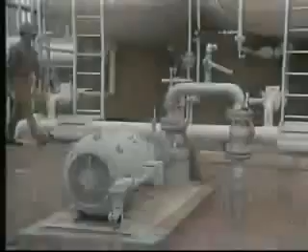So what do we now know? The major parts of a centrifugal pump and how the pump itself basically works. In this section, we'll learn more about the external components and what they do.

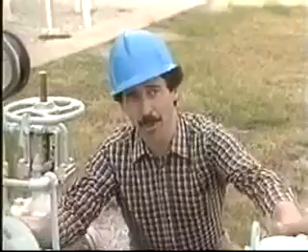This is the second section of a 4-section module on centrifugal pump principles. This section covers external components. By external components, we mean those parts that can be seen when you walk up to an operating pump. Specifically, we're talking about the casing, the stuffing box, the bearing housing, and the coupling.

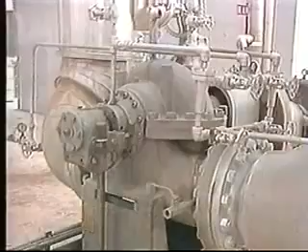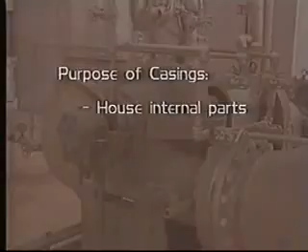Casings are usually made of cast iron for low-pressure pumps and of steel for high-pressure pumps. Steel or cast iron casings serve 3 primary purposes. They house the internal parts, keeping them in the proper position and protecting them as well. They confine the fluid being pumped and direct its flow. And finally, they form the volute and connection points for suction and discharge piping.

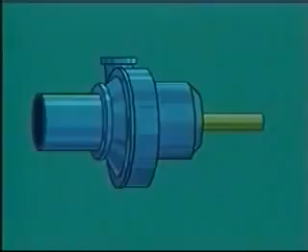Pump casings have 2 designs, solid or split. Solid construction casings have a removable cover or faceplate that gives you easy access to the impeller. They're called solid because the discharge casing is one piece.

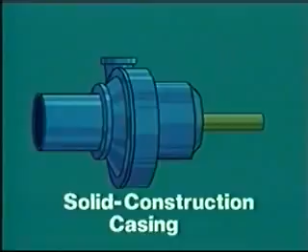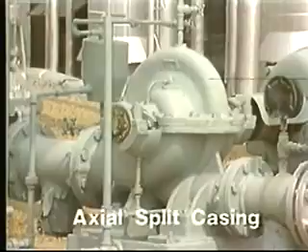Split construction pump casings are either axial or radial. They're axial if the split is along the center line of the shaft. If it is, the upper half of the casing can be removed, giving easy access to the pump shaft, impeller, and bearings. Radial splits are perpendicular to the center line of the shaft.

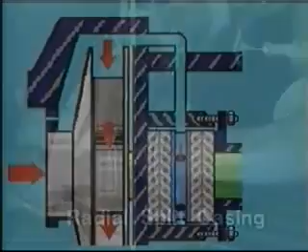The advantage of this design is that the casing can be made up in segments and bolted together to form one pump. With some larger centrifugal pumps, there's a gland sealing line that supplies sealing fluid to the packing in the stuffing box.

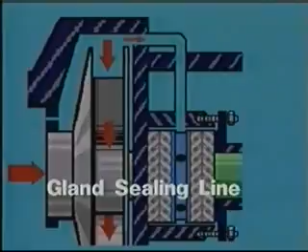Most often, the sealing line delivers fluid to the stuffing box from the upper casing. Sometimes, though, the sealing fluid may come from an external source, particularly if the pump is pumping a corrosive or abrasive substance. There's another difference on larger centrifugal pumps.

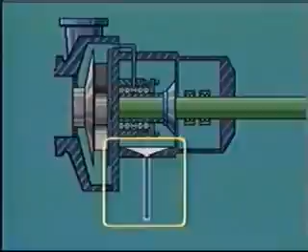The external section of the lower casing half may form a small open well to catch fluid leakage. There's a pipe called a slop drain at the bottom of this well. Leakage can be drained through this pipe.

Now let's take a look at the stuffing box. It holds the packing gland. That gland, in turn, is designed to regulate fluid leakage around the shaft. We'll talk more about pump packing in the next section.

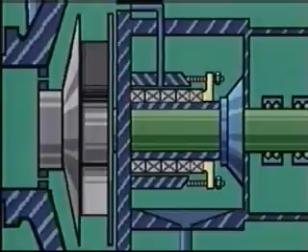A gland follower is also found with the stuffing box. Basically, it's a bushing designed to hold and compress the packing gland in the stuffing box. Bolts usually hold gland followers in place. They're also used to adjust the gland follower's position.

These are bearing housings. They support and protect bearings. There are different types of bearings. We'll look at them and their purposes in section 3.

Right here, next to the bearing housing, are flinger rings, or shields. They're attached to the pump shaft and fling fluid leakage from the packing gland away from the pump shaft. That keeps the fluid from leaking into the bearings.

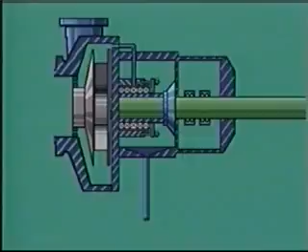You already know that on most centrifugal pumps, couplings join the shafts of the driver and the pump. They have to be flexible enough to handle misalignments between the shafts, as well as changes in the driver's speed.

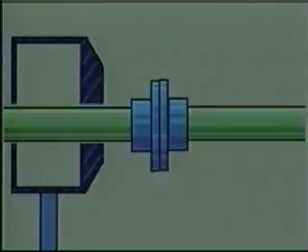Alignment of both shafts is critical for good, smooth operation of the pump as a whole. If they're not aligned correctly, the shafts and other pump parts will vibrate. If that vibration gets serious, it can put enough pressure on the shafts and couplings to break them.

Vibration can do other damage too. It can cause bearings to wear, internal parts to rub, and impellers to become unbalanced. Now this is just to name a few of the problems. When any of these occur, we've got downtime and equipment that needs to be repaired.

In the next section, we'll look at the internal components of centrifugal pumps. Stop the tape now and review this section. View the tape again if you wish, and then move on to the next section when you feel you're ready.